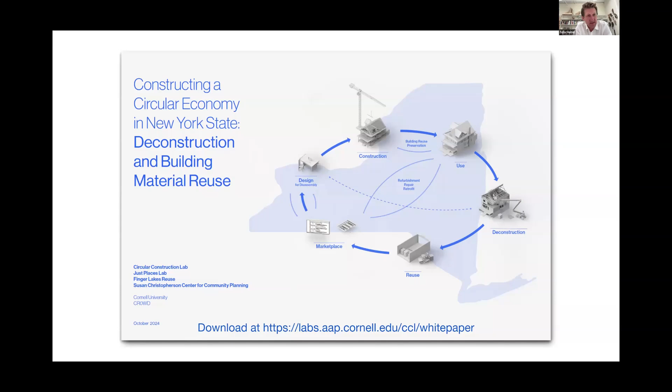As Jenny and Gretchen mentioned, and maybe Wyeth, if you can go to the next slide, this document is really an incredibly collaborative effort. It has a crowd editorial team mentioned already with Wyeth, Jennifer, Dan, Gretchen, and myself, but it goes far beyond that. We had students and fellow faculty members from Cornell helping us in the research. I want to shout out to Denise Ramsey and Lori Leonard from the business school and global development respectively. Courtney is on the call with us today, but then we had Roma Patel, Jumbo Huang, Annie Stewart, and Kaya Foti from different departments at Cornell, which represents the interdisciplinarity of this research and the need for interdisciplinarity in developing a circular system. We've had external consultancy partners like Brett Guy from Material Reuse and also Build Reuse, and a shout out to David for the fantastic graphics and layout of this paper.

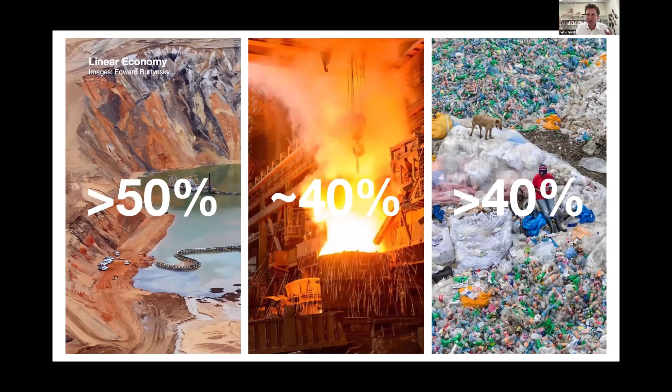The story of this white paper started several years ago. It's grounded in the work of Crowd, which you're familiar with since this is the Crowd conversation, so I don't need to introduce that. This group started from a concerned group of partners witnessing demolitions in the area and quickly advanced into an advocacy group that now is working New York statewide. Over years, we've had conversations about how to best put out our findings, how to help develop a foundational understanding of the status quo of the industry, both demolition and deconstruction and reuse in New York State.

But this conversation quickly advanced by adding partners to it, and some of these partners I do want to mention. First and foremost, New York State Assembly member Dr. Anna Kelles, and then in extension, New York State Senator Brian Kavanagh, who joined this conversation and really felt the need for a white paper to convince other stakeholders of the need for new policy and legislation moving forward. And so with the help of the Cornell Atkinson Center for Sustainability, we were able to fund a group and finance the writing of this white paper over the last couple of months leading up to today.

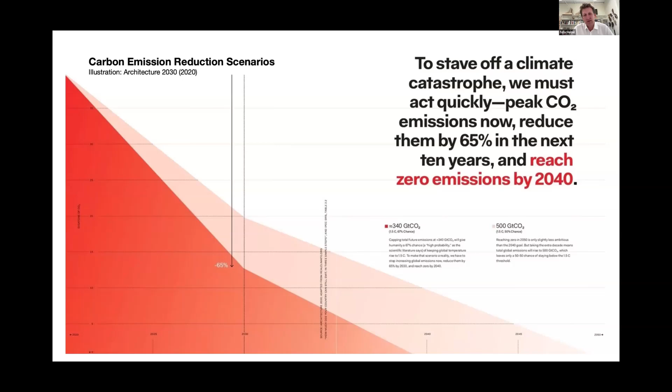The circular economy is what we would understand as the answer to this—phasing out linear aspects of the current economic system and moving towards circular systems, specifically focusing on reuse as the most sustainable, most local, and most effective circular economy solution in the kit of parts we have to choose from.

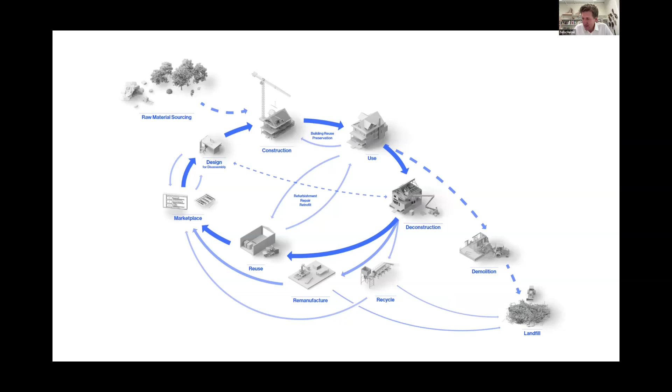As we noticed, or were able to prove during the writing of the white paper, the impacts of reuse go far beyond the environmental aspects—they are economic and social. They have to do with job creation, economic impacts, material reuse, and the creation of a new market and a new infrastructural system for New York State.

The other aspect we noticed is that New York State has a very great foundation for this. If we look at recent papers and ordinances passed—specifically the 2019 Climate Leadership and Community Protection Act, the 2022 executive order, or maybe most significant, the 2023 New York State Solid Waste Management Plan—it actually has the circular economy in its title or subtitle: building the circular economy through sustainable material management.

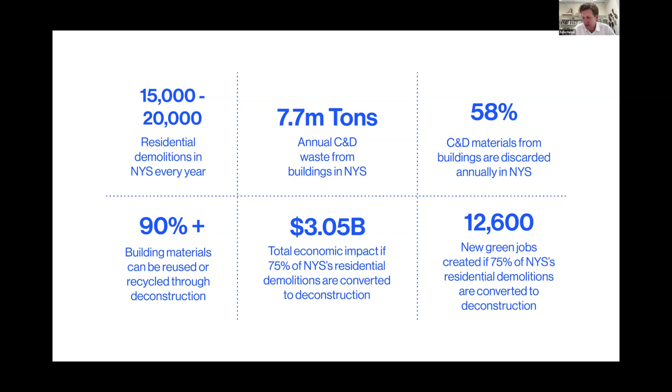So all of this sets the ground for the recommendations and research you're about to hear from Wyeth in more detail.

Quick overview of the structure of the paper. We're going to walk through this at a higher level, then get to some questions at the end. Like Felix mentioned, we discuss the issue at a global scale, and we also spend the majority of the paper applying a New York specific lens to this problem and to the solutions we foresee going forward.

We brought a lot of specificity from those plans that Felix mentioned, the work already being done around the state. We pull inspiration from work happening across the country. We then tried to paint a picture of what this would look like at scale in New York State, from an economic and workforce development lens, a waste lens, and other lenses.

Then we look at how to get there, and we lay out—I think it's 19—a pretty comprehensive list of policy and practice recommendations. Some are legislative, some administrative, some happen within state agencies, but it's really a comprehensive playbook, hopefully, to move New York State toward a circular construction economy.

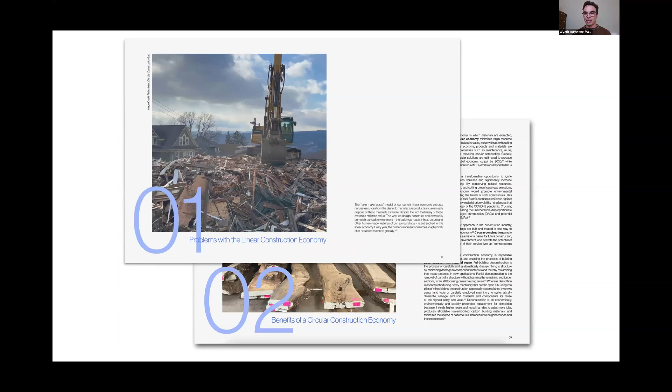And so that starts with talking a little bit more about the issues with the linear construction economy specific to New York, but also what we see the alternative being.

As Felix began to talk about, I think a lot of people are familiar with this, but we know that demolition and landfilling of building materials has negative implications socially, culturally, environmentally, and economically—that's an argument we really tried to prioritize, knowing it resonates with a large group of people. Demolition is quick and efficient upfront for the people doing it, but it has implications for society and the economy on a longer scale.

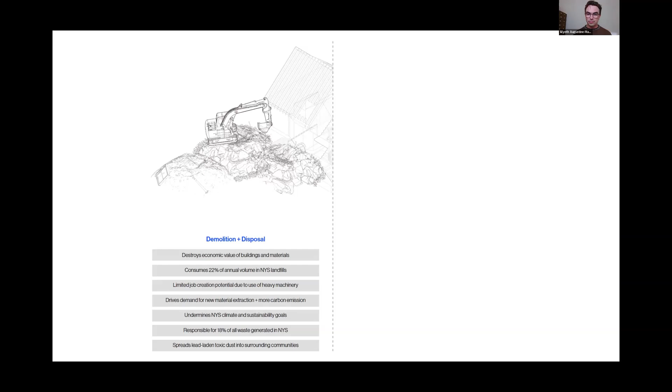We see deconstruction as an option and alternative to demolition to mitigate some of those challenges. So if we end the lifespan of a building, we have an opportunity to extend the lifespan of the materials, create economic activity down the line, divert waste, and support broader New York State climate goals.

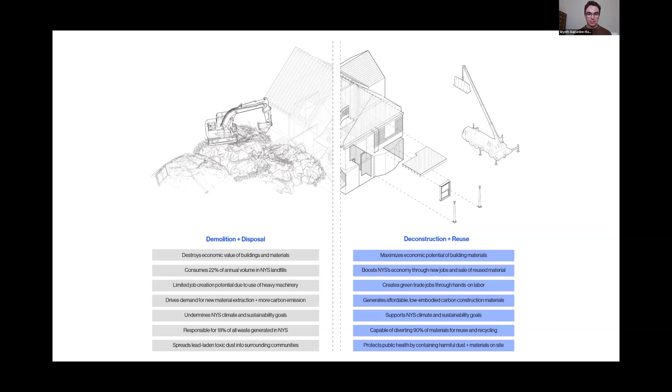Especially for the purpose of this report, we see that deconstruction and reuse—the right half of this graphic—has higher economic factors across many measurements: direct sales and goods, capital purchases, protection of the natural environment. Deconstruction and reuse is actually the better economic choice once the infrastructure is in place, once we commit to it wholesale.

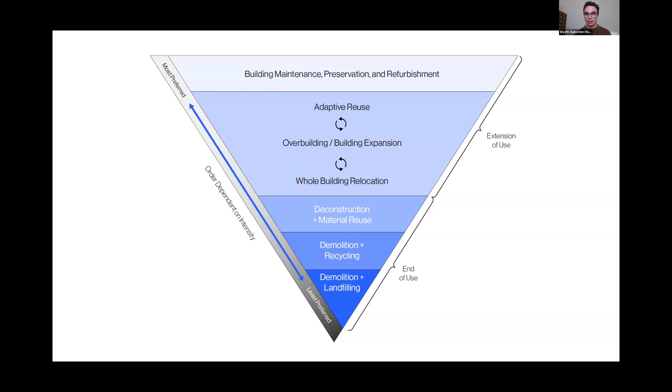As important context, to put deconstruction and reuse into the broader circular and sustainable built environment, we see deconstruction as only an alternative to demolition, whereas other methods that extend the lifespan of a building, like maintenance, adaptive reuse, expanding a building, or even moving an entire building, are typically preferred from an environmental perspective over deconstruction and material reuse. So it's important to see deconstruction as an alternative to demolition, but not necessarily as an alternative to extending the lifespan of a building as a whole.

Looking at New York specifically, we tried to leverage all the research done primarily through the New York State Solid Waste Management Plan, put together by the New York State DEC, which was a fabulous resource for us and brought a lot of things to light.

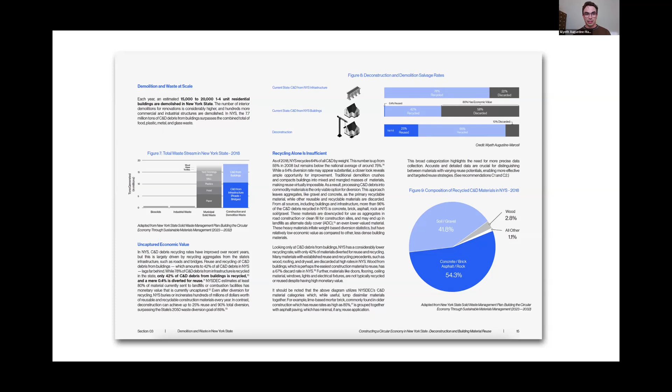One thing we had to work hard on was understanding the scale of the demolition problem in New York State. We estimate there are between 15,000 and 20,000 full building residential demolitions in New York State every year. This is only full building demolitions for residential buildings, not even considering commercial structures, partial demolitions, renovations, and all of those things, but it starts to touch on the scale of this challenge just in New York State.

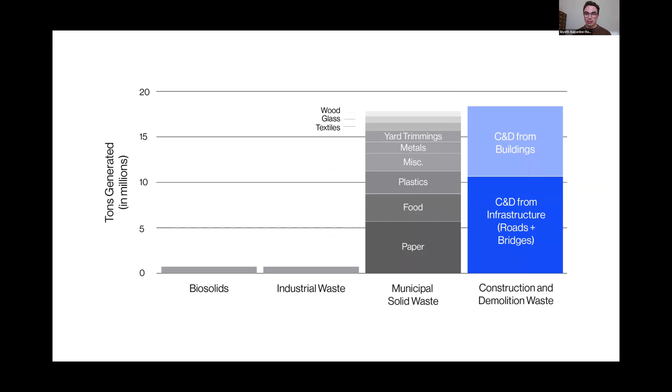Another New York State finding, directly from the Solid Waste Management Plan: C&D is actually the largest waste stream in the state. C&D specifically from buildings is about 40% of that, which is higher than the national average.

When we look at New York State's recycling of C&D, there's a fairly high recycling rate, about 66% statewide. But when you look at the materials being recycled, it's largely aggregates, concrete, brick, asphalt, and things like that being ground and used for road base or landfill cover. So a lot of materials with high reuse and recycling potential are slipping through the cracks of the system.

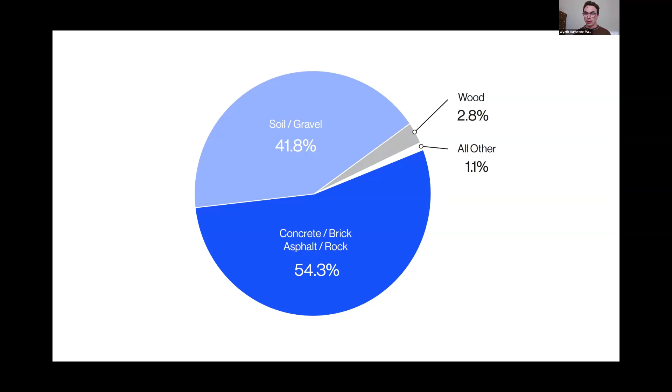That's further exemplified when you look at recycling and reuse rates for different material streams. For infrastructure, roads and bridges in New York State, about 80% is recycled, so there's a really robust system for that. If you look only at buildings, only about 42% is recycled, and reuse is happening at a very small, largely informal, but growing 0.4% of all materials.

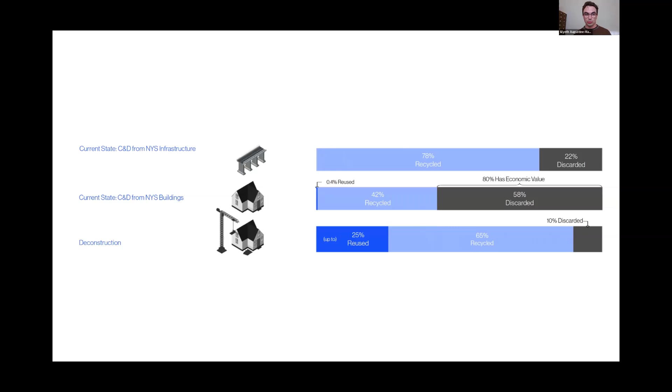If you look at deconstruction, you can see its potential. On a per-project basis, up to 25% of building materials could be reused, whereas 65% could be recycled — a really high diversion rate per project. If we can scale that, we can start to improve recycling and reuse rates across the state.

We also feel this is a really important challenge to tackle at a statewide level, because especially in New York, it's widely varied how recycling, deconstruction, and reuse are done. This is just one example: if you look at the highlighted column down the middle, there are some DEC regions with very high recycling rates, about 66%, and other regions with virtually no C&D recycling options. So having a statewide solution is crucial to apply this evenly across a very big state.

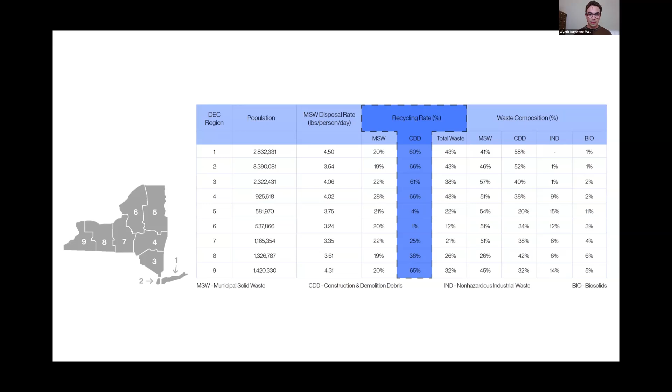Those are the two largest acceptors of C&D waste in the state, and they just so happen to either be stopping accepting C&D or closing potentially in the next year. This really underscores an urgency that is going to be felt very directly in New York State. That's about 32% of all C&D materials in the state potentially won't have anywhere to go in as soon as a year.

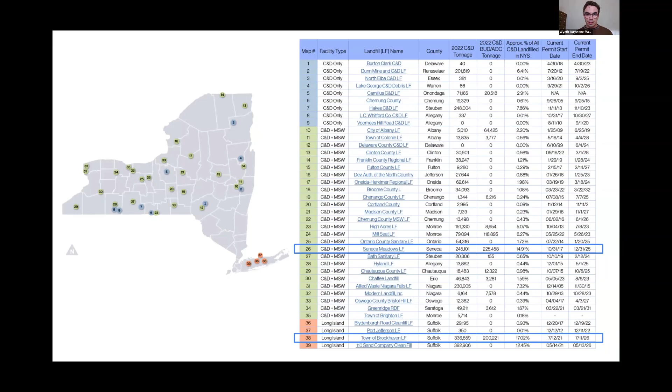So that's kind of the challenge. We also feel like deconstruction and reuse at scale can be an answer to some of those questions, and tried to paint a picture of, if we can scale deconstruction or reuse, what that would look like from an economic perspective. So I'll pass it to Courtney to talk this over.

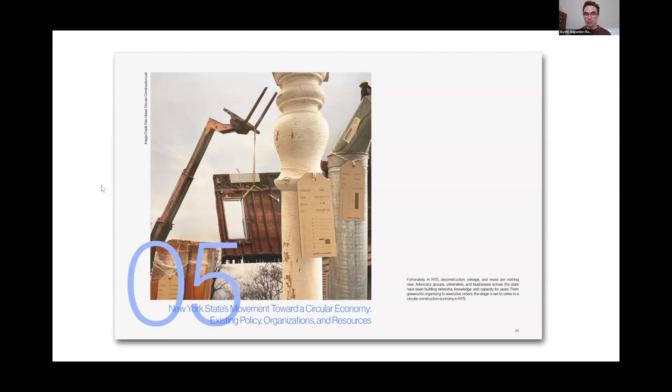And so when we started looking at making recommendations for New York State to actualize some of that potential, as part of Crowd we're kind of aware of all of these things happening in New York State. And as we dug in, we recognized that New York State is already very well positioned to approach deconstruction or reuse at scale, especially at a New York State level.

And so these are just a select group of already enacted or passed state level actions. From the New York DEC, which we've referenced, there's a handful of specific action items within that plan that are specific to C&D, reuse, and deconstruction. The CLCPA, which is kind of New York State's landmark plan to make it a leader in sustainability, has at least 3 items that are specific to circularity in the built environment.

State agencies are directed to become more sustainable and focus on their C&D materials. And then there's a number of other related policies and approaches on the books within several different agencies. There's different agencies working on it. There's municipalities throughout the state who are thinking about deconstruction ordinances or other ways to mandate or move deconstruction forward or incentivize it. So it's really kind of fertile ground in New York State, which is a huge advantage.

Not to mention all of the different organizations like Crowd and Finger Lakes Reuse and all of these places that are practicing this on a daily basis. So New York State is already really well positioned.

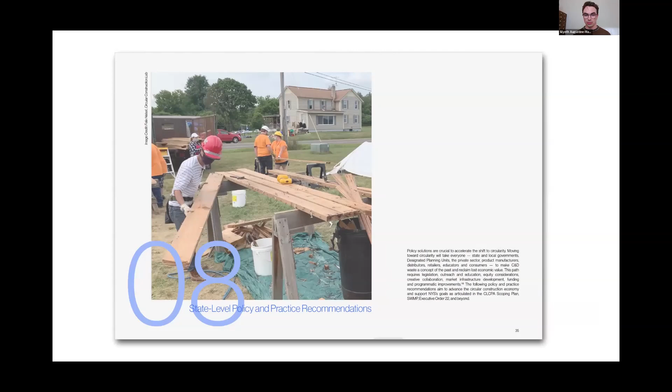And then when we look at what we feel like needs to happen to move New York State into that next step into the future and to realize some of that potential, we've laid out 19, I think, count them, recommendations across 5 different categories.

And so we recognize that it's crucial to build the workforce, the market, and the infrastructure to support all of the different individual actors throughout the state. We recognize that New York State, as the largest purchaser of building materials in the state, has huge potential to lead by example and put the money where the values are or have been purported to be. And then some broader things around supporting long-term circularity and supporting this movement as a whole.

And so we won't walk through all of them. There's some really wonderful detail through the document, but just to highlight a couple of those things.

A trained workforce and contractor, a group of contractors throughout the state is really crucial because deconstruction, while it is kind of a simple concept, it can be complex and it can be dangerous. So contractors and employees need to be trained on how to do this safely, how to maximize the value of material. But also, deconstruction jobs are a really great pathway toward other trades jobs. So learning how to use hand tools and power tools and all those things is kind of a great step into the workforce.

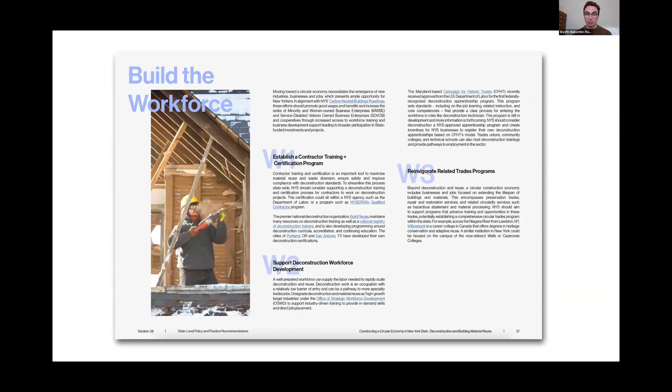Building the market is perhaps the biggest question that deconstruction advocates get. If we have all these materials, where are they going to go? So rather than starting with a full mandate across the state requiring deconstruction of a certain number of buildings, we propose that the state provides incentives for municipalities to pass deconstruction ordinances, backed up with targeted funding so municipalities aren't operating without proper support. There have been examples of municipalities struggling, but also success stories, and those often come with state level support.

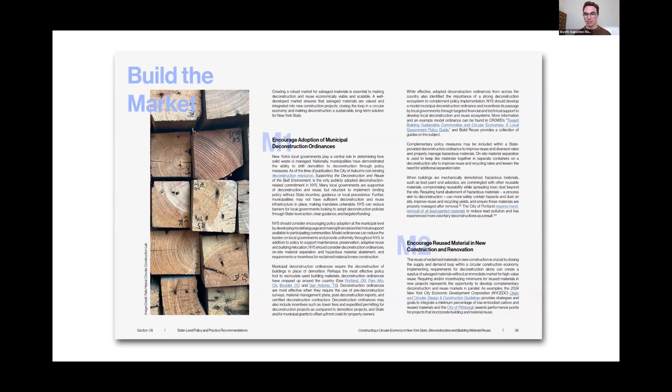Infrastructure is crucial. These materials have to be processed, sold, and find new pathways back into new buildings or refurbished buildings. The space and capacity to do that is really crucial. We see a couple different avenues for the state to support that through grants, through potentially a surcharge on tipping fees that could go directly towards reuse programs, redistributed to communities throughout the state, and other things like that.

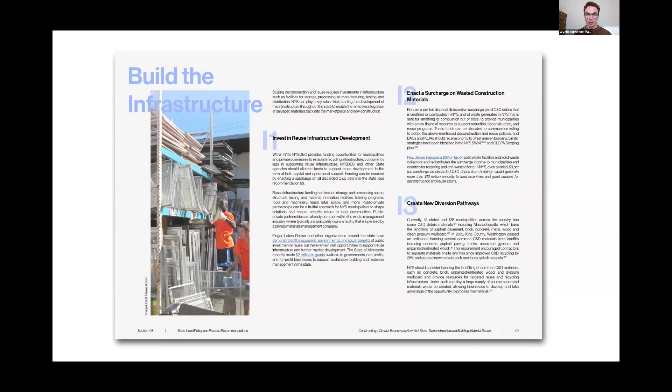The state plays a really big role because they manage billions and billions of dollars in construction projects. Similar to the federal government strategy to purchase specific materials that are lower embodied carbon, we proposed reused materials for capital projects, which represents a really important opportunity to stimulate the private sector by purchasing those materials. That could be in the form of categorizing all reused materials as green materials in the state system, or requiring a minimum percentage of reused building materials in state projects.

So the state plays a really crucial role. Some learnings we came across in the course of this work, and trying to compile all the information for this report, is that it's really hard to get a sense of what the C&D material movement is in the state. One approach would be modernizing how data is collected, perhaps creating standards across the state so we have a better sense of how many buildings are coming down, where, and what kind of materials are coming out of them. Even modest amounts of information would really help markets develop to react to those supplies.

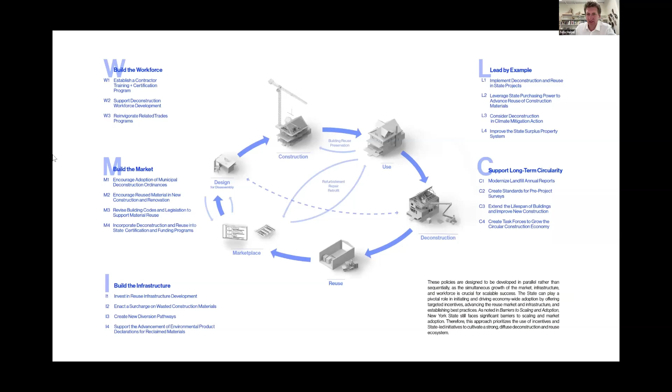And I'll pass it over to Felix to summarize and take us home. Thank you so much, Wyeth and Courtney. My role is an easy one now, we just have two slides left to lead us into the conversation.

To summarize, we see an incredible economic, ecologic, and social benefit from a shift towards deconstruction and building material reuse. If you summarize these many policy recommendations, they really try to cover aspects of data collection, a robust market, leveraging existing purchasing powers, encouraging local policy adoption, and targeting workforce development.

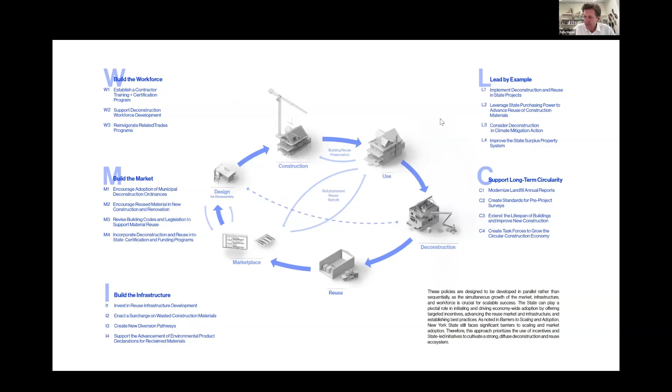Some aspects, and I think we'll get to them, I've been reading the many questions you've already put into the chat, so I'm really looking forward to that conversation. I do want to thank all of the authors again, and lead towards what's next. Our hope is that this paper encourages the many aspects we just mentioned.

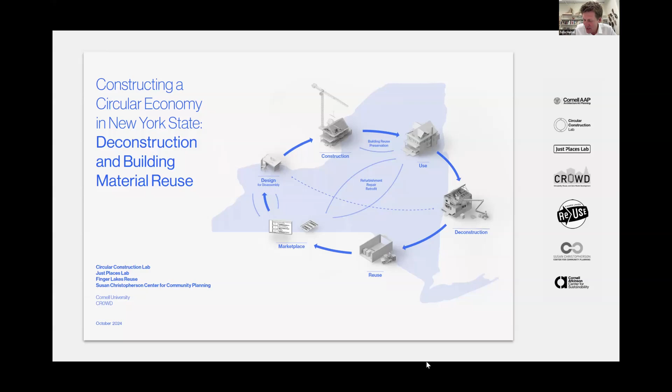I also see really interesting comments already in the chat from Dr. Anna Callas, for example, about future steps. Our hope is really that this leads to advocacy, that we're encouraging a conversation, getting as much feedback as possible to build on this, to work towards additional white papers that really drive and encourage legislation. We're really looking forward to this open conversation that comes out of this paper.